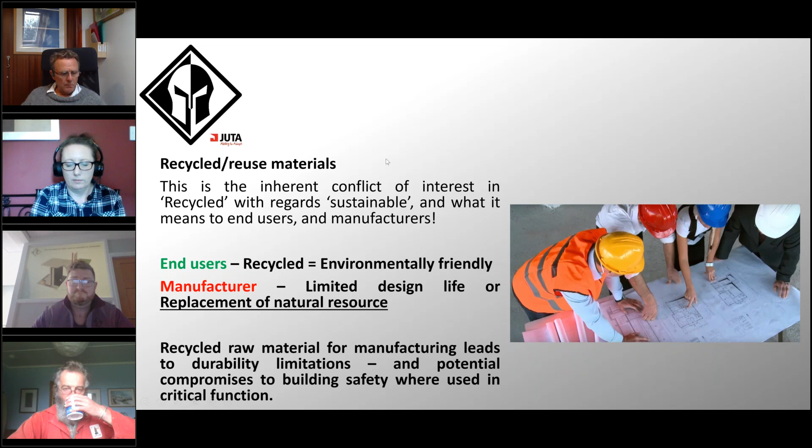And what that does is it creates two classifications of products. So we have what are called LLGs, limited lifetime geosynthetics. These are products which are not designed to perform a critical function for a long time, so usually the application function is restricted to 5 years, sometimes up to 25 years. So you may be looking at slip membranes or some facade landscaping details on the external side of a building rather than anything that goes on the inside.

Extended lifetime geosynthetics, or ELGs, are generally providing critical functions, such as protective barriers like gas membranes, and they are designed to last for a period or have an anticipated design service life of at least 50 years, which is Eurocode 0 Cat 4 structure, residential housing. So your Cat 5 structures, for any structural engineers who might be in here, the highways, rail buildings, have a 100-year anticipated design service life. So you're looking at much more robust and additionally tested materials.

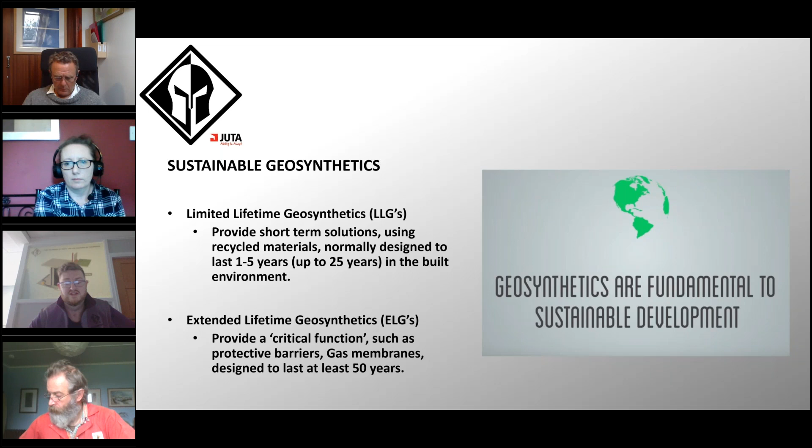Gas membranes - one of the most common questions we get asked, probably 3-4 times a day, is: is your gas membrane also a damp-proof membrane? So all gas membranes are damp-proof membranes. They start life as a damp-proof membrane. They're harmonised and certified under European and British standards as damp-proof membranes, and then we do additional things to them to give them gas resistance.

So we have harmonised European standards, and then we have local standards, which are country standards - British standards, American, we might have some Australasian standards. Gas resistance is a local standard, so that varies by country in terms of what their relevant guidance documents state is appropriate for gas resistance.

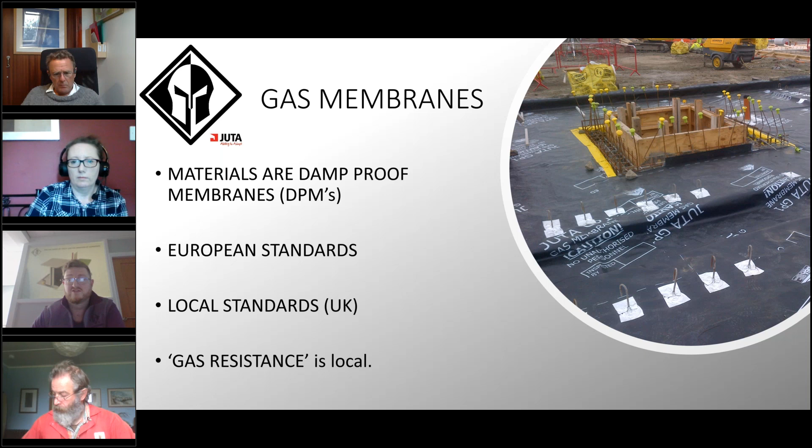So in terms of European standards, all materials sold into the EU will still be bound by CE marking, unfortunately, or fortunately, if you look at it that way, when we leave the European Union or the Common Market. But it must be accompanied by a CE mark, which details the application standard. So the product has been certified for use in the application standard to the relevant harmonised European standard, and it's marked as such, which is all about traceability as well.

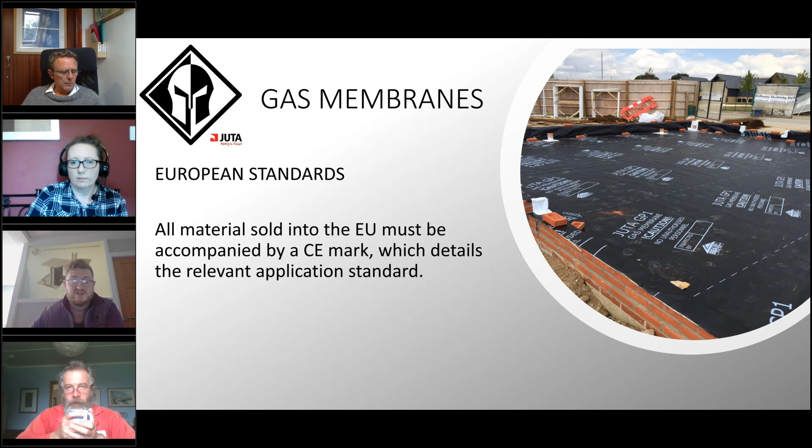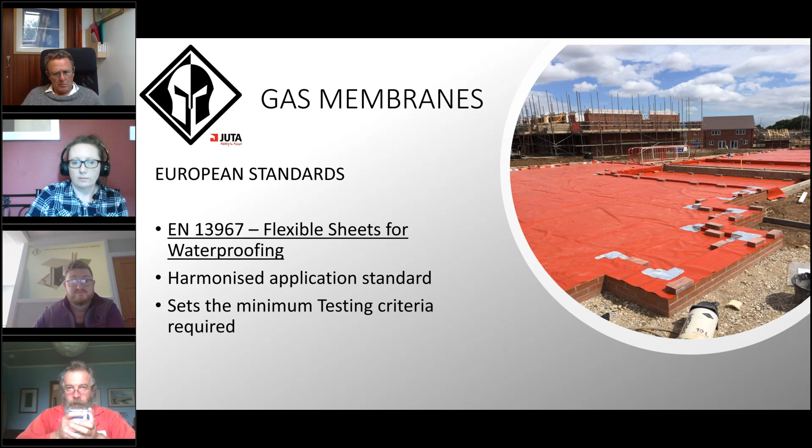The overriding standard for gas membranes, which is the DPM standard, is EN 13967, flexible sheets for waterproofing, and that's a harmonised European standard. So all gas membranes that enter the UK market should be accompanied with a CE mark for EN 13967 for damp proofing. It sets testing criteria and what we are obliged to provide as a manufacturer in terms of minimum stated properties, or essential characteristics. So we have to declare these. That's a legal obligation for us to conform to CE marking, that we declare these properties.

Now, you would be probably amazed, maybe not, how much material enters the UK market and is used in these critical application functions without CE marking. So as a basic check, we should be looking at CE marking for traceability.

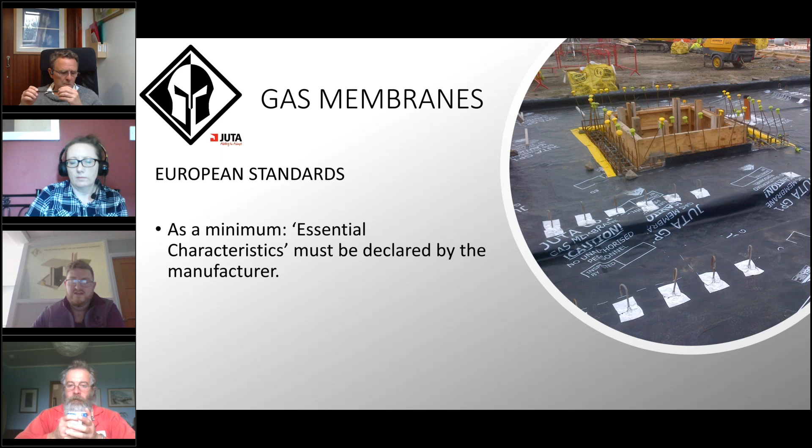EN 13967 actually has two notations, so you'll see EN 13967 type A and type T, or A/T, which is both. A is above ground, so it has a 2 kilopascal, which is a 200 millimeter hydrostatic head test pressure, and T for tanking or below ground is a 60 kPa hydrostatic pressure or 6 meter head. So A for damp proofing, T for waterproofing. If it's EN 13967 A/T, it means it can do damp and water. So the majority of above ground gas membranes are EN 13967 type A, and that restricts their application depth to within 200 mil of below ground level.

Now that relates to what warranty provision your manufacturer will give you, which I'll touch on later. So where we start using these gas membranes, or what is traditionally a gas membrane, underneath a lift pit, which is 2 meters below ground, we can't warrant the application because the material is not tested or certified to perform the application function in those conditions for a period of time which exceeds 50 years.

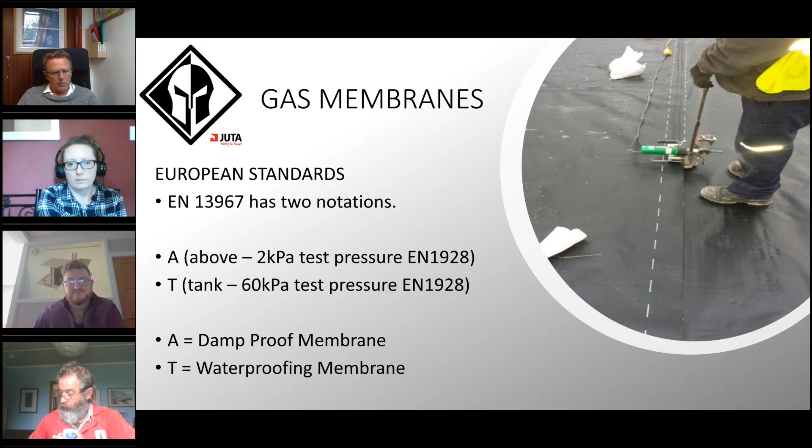So essential characteristics, and again, if we look at what we should be seeing on a classic technical data sheet - my marketing and sales department go mental because I just want to put data on everything. Because I'm an engineer, so I just want to see the data. I don't want to see all this fluffy language around how great the product is, how we're market leaders, and how many millions of square meters we've sold. I want to see the data.

So as a minimum, we should be seeing reaction to fire, tensile strengths, impact resistance, tear strengths, and a bit of durability information for EN 13967. These are the required properties or essential characteristics we are mandated, legally obliged to declare for providing material onto the market as a proprietary gas resistant damp proof membrane.

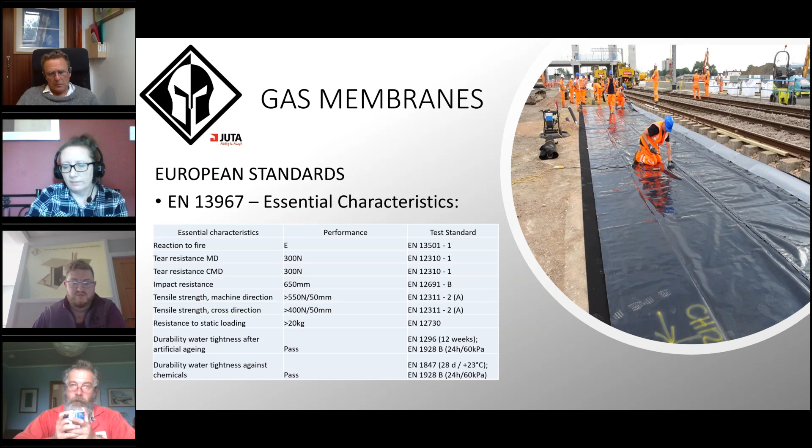So again, don't do it right now, but when you get a chance, check your folders for the data sheets you've got in there, and just sense check how many suppliers or manufacturers are providing you with that basic level of information.

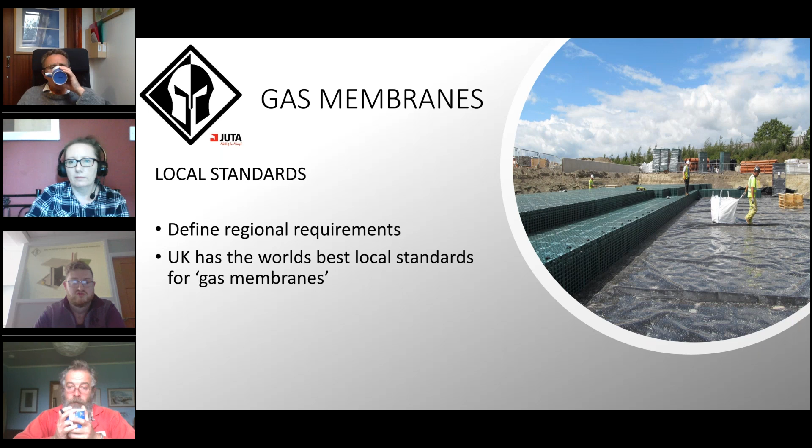Local standards define the regional requirements. So primarily we're looking at British standards, and the UK has some of the world's best local standards, world renowned for providing good, robust standards in terms of local requirements, but they're not mandated, so it's not a legal requirement.

But primarily we're looking at BS 8102 waterproofing requirements, BRE 211, 414 radon, contaminated land, 8485 methane and carbon dioxide, C748 for VOCs, which again is picking up more and more traction these days because of the brownfield side of things, and C665, which is slightly out of date.

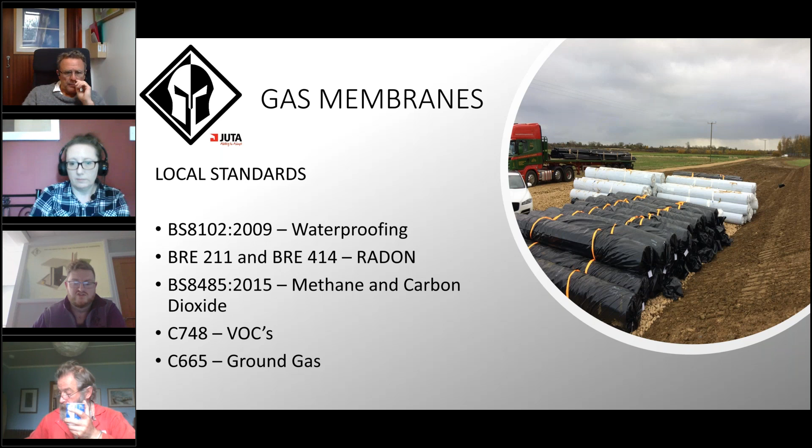I have a minor issue we can discuss later if you want, around the NHBC Amber 1 / CS2 classification. That's a misnomer, but it stems from 665 and that traffic light system. But these are local standards or regional requirements.

They're not legal, so we are not legally obliged to comply to those standards. It's guidance. This is the information we'd expect to see in the UK if you are purporting your materials to be a gas membrane or a waterproofing membrane. These are the relevant standards you should consider.

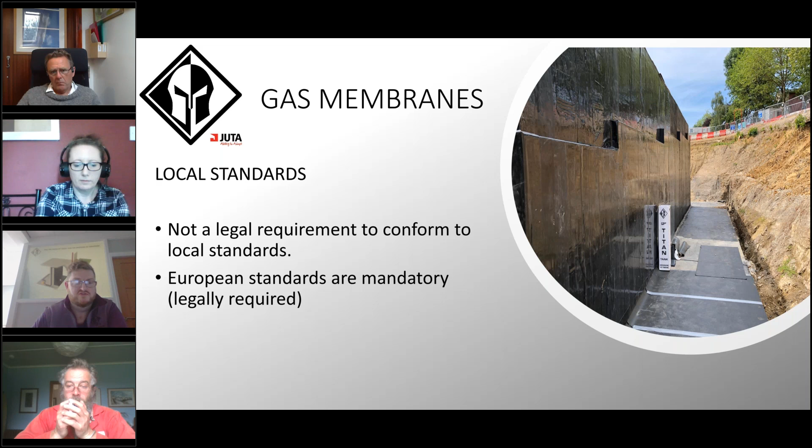European standards form a legal requirement for manufacturers. So, common gas barrier types.

We have monolithic polyolefin, so this is the same composition of material throughout. So your HDPE, LLDPE, LDPEs, PPs, polypropylene, sometimes recycled. So this is very old technology.

Reinforced polythene - this is the scrim reinforced materials which give improved resistance to tearing. The flat sheet plastics have had a tendency to tear, so with wind uplift you would see these huge lateral tears across the material around the folds. Then we've got, which is a very common breed of gas membrane at the minute, the aluminium foil reinforced polythenes.

This was primarily driven by the change to BS 8485 in 2015, where we dropped in the gas transmission rate as a benchmark for manufacturers. So we all raced to test our materials, and we found that we were looking at aluminium as the most reasonable course of action in the short term.

And then we have this new breed of materials, which are the multi-layer polyolefins. These are 5 or 7 layer products, usually with an EVOH barrier in the middle and then protected by various layers of polyolefin on the outside with no aluminium in them.

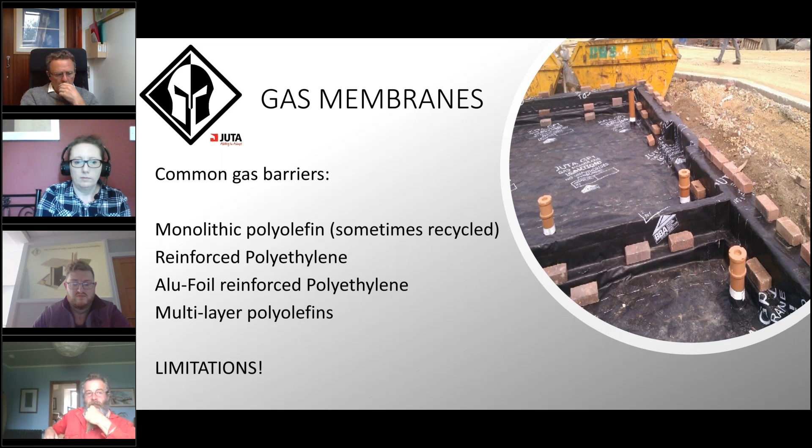But all of these materials have various limitations, and what we don't do as suppliers or manufacturers is shout and scream about the limitations. I mean, why would you? JUTA is the biggest supplier of aluminium foil gas membranes into the UK, and 50% of the jobs we're supplied onto, we probably shouldn't be using it there because of the limitations, but we're not the regulator. So if the clients, end users, engineers, architects don't want to listen to us, then that's on them.

The end use of the produced part or the product should always determine the choice of raw material. So if we look at the history or development of gas membranes over the years, 70 years ago, most of the materials supplied to perform the application function were flat sheet HDPE, LDPE, PP membranes, used commonly across the world as moisture, vapor and gas barriers.

And we've developed our understanding over time, both in terms of material performance limitations in the built environment and the advancements in technology and processing.

About mid-90s, sometime around 95, 96, all of the polymer producers and manufacturers in the world realized we could start reprocessing some element of finished goods, potentially adding in an element of recycled product from single-use plastics, and produce materials with limited lifetime application functions.

Now, around the same time, early 2000s, industry stopped asking about durability. I remember this because I started working in consultancy in 2001, and the first thing I asked was, how long is that material going to last? Like, if we stick a plastic membrane around that building, it's going to get trashed. It's going to get absolutely trashed.

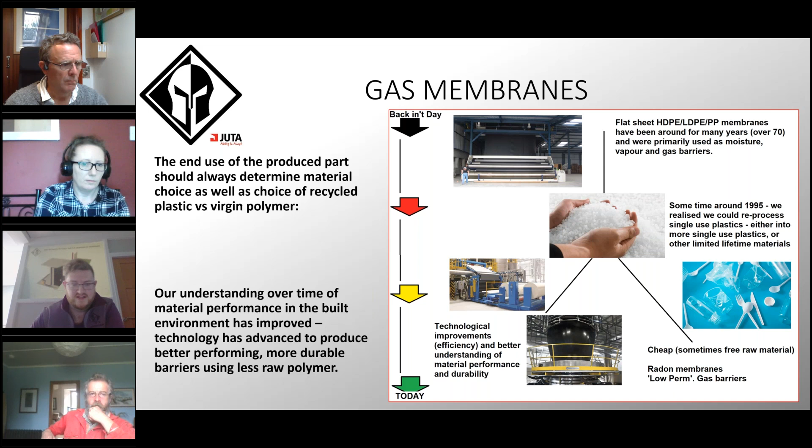We've actually, over the years, started to produce much better barriers out of virgin raw materials, so we can use less polymer, we can use it more energy efficiently, and we can make sure it lasts for a long time. So it's the two different sides of sustainability and what it means in regards to the end use of the product. Hopefully a lot of this is common sense, but I tend to find maybe not sometimes.

So if we look at the design guidance and what we should be considering, we've got, as some would have you believe, like the gospel - the gospel according to BSI, BS 8485, updated in January 2019. So it is the most up-to-date and relevant guidance document out there.

Here's my colleague arriving 25 minutes late, noted, black mark.

So you're all familiar, we've got a classification system. It's a risk matrix, and we're going to this point scoring system. Obviously the CS can be defined by simplified analysis using GSVs or a more quantitative determination of the actual risk.

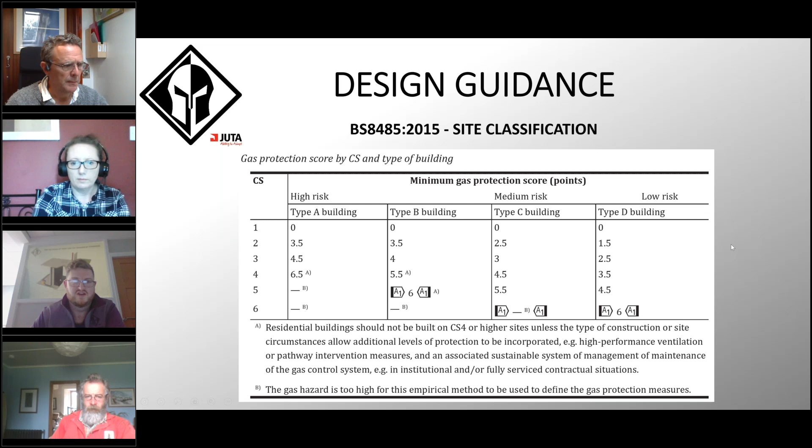We're focusing obviously on the membrane side of things today. We're happy to look at the document as a whole if anyone wants us to do any CPD on BS 8485 in more detail. And you've got a lot of text here, and as an engineer it really upsets me because there's an overuse of the word sufficiently.

So we say sufficiently impervious to ground gas, and then we define a benchmark value, which is great, and that was actually a really good thing for industry to have this. What is sufficiently impervious to ground gas without any further assessment? It's less than 40 millilitres per metre square per day to ISO 15105 Part 1 manometric.

Material should also be sufficiently durable, so durability is a consideration in there for the anticipated design service life. Sufficiently strong to survive installation and follow-on trades, sealed to the entire footprint, and then verified, so quality controlled. You'll have heard probably other people say it: it doesn't matter how good the material is, if it's installed like a bag of spanners, then it isn't going to work. So the quality of the install and the checking, particularly of the sealing around penetrations, corner detailing, to ensure you've got a robust sealed system across the footprint of the building, is an important process.

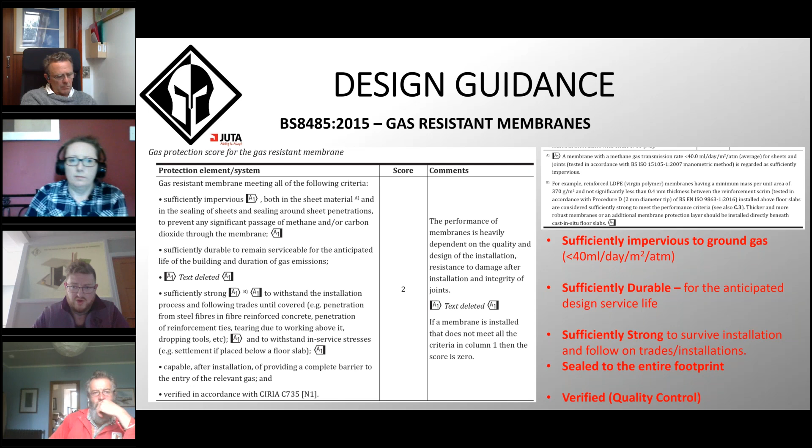But sufficiently, yeah, we can define it. So when it comes to sufficiently durable, we've got manufacturers' material warranties.

As I touched on earlier, if you are installing, for example, a GP1 product below a lift pit, and then you come and ask JUTA to give you a warranty for the material for building control, and they're expecting to see a warranty of 50 years for the material, then you ain't getting it from JUTA. We're ethical in our approach, we'll tell you you shouldn't be doing that. Others may give you that - I don't really know, to be fair, if anyone is doing that. I doubt it, I just don't think we're asking for it. But if we look at...

Clicking not coming through there. If we look at puncture resistance versus pressure, there we go.

Most gas membranes sit at this 1 kilonewton puncture resistance mark, or 1,000 newtons, which is primarily why your manufacturers or designers will look to incorporate the use of a sand blinding layer. So the lines across the detail are various stone grading: blue line 2 mil, orange line 5 mil, 20 mil, 40 mil stone. Pressure applied, and then puncture resistance on the y-axis, and you've got puncture resistance of the membrane plotted there.

600 kPa applied pressure is standard protection efficiency testing for geotextiles. So we know a geotextile will generally protect a membrane under a 20 mil aggregate, or laid down onto a 20 mil aggregate before the membrane goes on there, and 900 kPa for truck loading. So we generally don't encourage the use of vehicular movements on these membranes, and particularly no slewing.

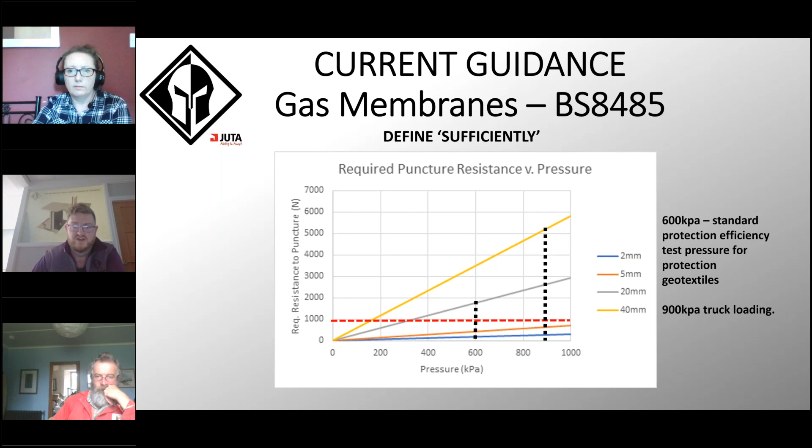BS 8485 is a great guidance document that encourages the use of qualified installers. As we creep through the coronavirus period, it becomes more prevalent that ground workers are looking to save money by not using specialist installers. They say, oh, we can do this ourselves, we'll get someone to verify it, validate it, tape it all together, and it'll be fine. Someone's going to sign it off for 500 quid, I'm happy.

But the reality is they generally aren't doing that every day. They don't hold the relevant insurances to give workmanship guarantees, which is why specialist installers exist. They are specialists and experienced qualified professionals in that field, and they have insurance, so they can give guarantees on the workmanship.

Validation is a requirement in there, as is the consideration of additional influences on the system, such as hydrostatic pressure. They throw it in there quite subtly in BS 8485 about hydrostatic conditions, without making much reference to the fact that most gas barrier materials are actually not designed to be in those conditions. It'd be far more reasonable to just say we should be using more robust materials in below ground applications.

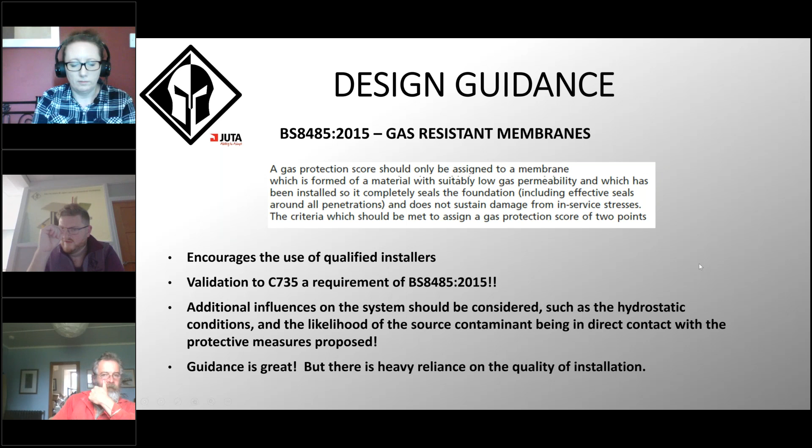Just while we're on BS 8485, I'll quickly touch on Table 5 as well, the structural element. There was a change in 2019 to effectively remove the grading reference for anyone involved in structural waterproofing. There was a whole host of confusion around point scoring for graded environments. So the point score in Table 5 is for the structure only, just the concrete element. It's not to be attributed to things like internal cavity drainage membranes, which inherently allow the risk on the inside, which is bad practice, or for the membrane on the outside.

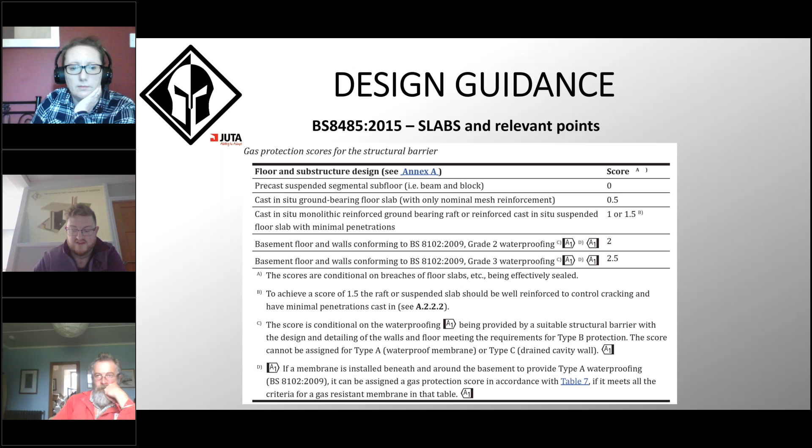Now, the note at the bottom says if a membrane is used around the structure to provide type A waterproofing, it can be assigned a gas protection score if it conforms to Table 7. So it must meet all the requirements of Table 7. You'll hear quite a few people say, oh, such and such has written me a report to say my membrane is gas resistant. That's complete crap. It should be a risk assessment based on any particular given site, not a holistic approach.

BS 8102 leads us nicely into this, again for anyone dealing with below ground structures or structural waterproofing. Because of the 8485 less than 40 mil benchmark, we've seen an advent of the use of aluminium foil products below ground. So what some suppliers are doing is taking an aluminium foil gas barrier damp-proof membrane and a GCL, which is an old school waterproofing product. They glue the two together and say we've got a gas and waterproofing barrier. Again, that's a recipe for disaster.

Aluminium foils, as we've talked about, are not designed or warranted for these application functions. On the negative side, they remove the bonding element of these 8102 type A bonded systems. On the positive side, it prevents hydration of a GCL type layer. And contrary to popular belief, aluminiums don't self-heal. Yet these products are marketed as self-healing gas and waterproofing membranes, despite containing aluminium.

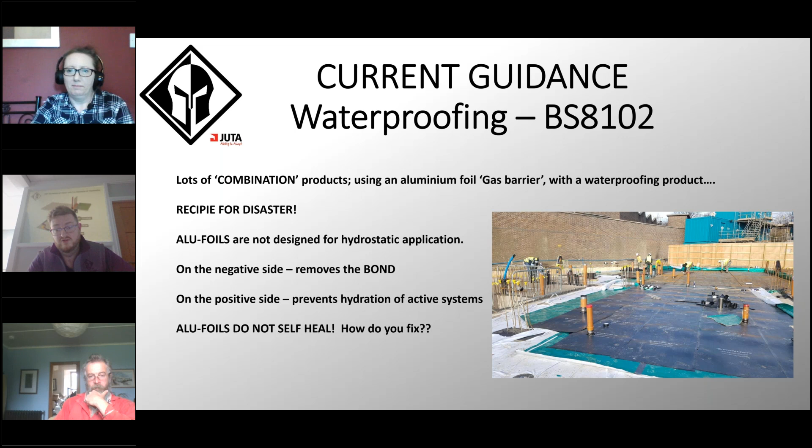So the last time I checked, Skynet was not live. Terminator 2 technology doesn't exist. If it did, we probably shouldn't be here - we should be running for the hills, getting in the bunkers. Metal does not self-heal, like fact. So that's a red flag in terms of marketing.

C748, guidance on the use of plastic membranes as VOC barriers, is a risk-based approach. There's some confusion about this document because unlike 8485, there are no quantifiable performance limits of material like the gas transmission rate of less than 40 mil. It's an information gathering exercise. What this document does is point you toward the information you'd expect to see when specifying or considering materials as VOC barriers. The uncertainty at present is there are hundreds of products out there which say they are VOC and hydrocarbon barriers, without this information. Hydrostatic application conditions are a consideration in 748.

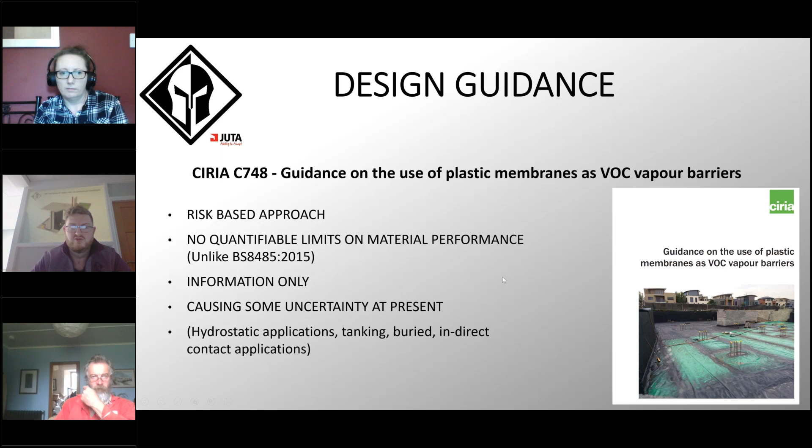Obviously the assessment with gas in solution or hydrocarbon solution is different to gas or VOC vapors, but without the information, you can't even begin to make those assessments. So C748, as many of you will know, has a minimum set of test criteria you'd expect to be provided by the manufacturer or supplier.

It should be tested for permeation rate against the challenge chemicals, the big nine—BTEX, hexane, vinyl chloride, PCE, TCE and naphthalene—to ISO 15105 part 2, and then have durability immersion testing to EN 14414 and 14415.

The only one we can't do is vinyl chloride, because an immersion test for 60 days at 23 degrees C with vinyl chloride is essentially creating a bomb. No commercial laboratory will complete that test—it's a military grade test and it costs £250,000, so it's not commercially viable.

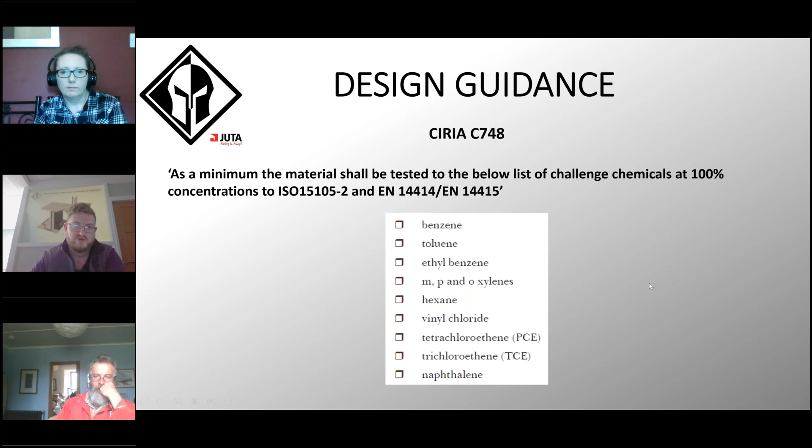So anyone reporting that is basically bullshitting you. Just be careful on that as well.

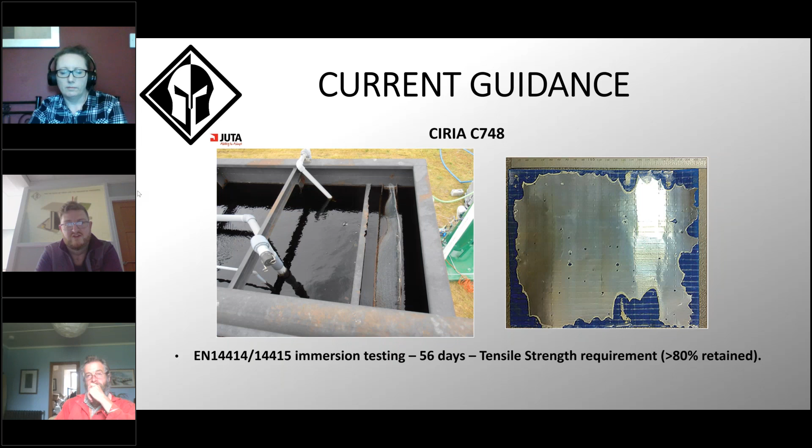An example here of aluminium foil that's come out of an immersion bath—actually an acid bath. You can see the acid has stripped the polymer back and begun to attack the aluminium, corroding around the scrim nodes of the foil. This forms the basis of why we don't warrant the use of these materials in the application, because we know they will fail over time. It's a limitation of the material.

Validation to C735, good practice, is a check, design and detailing service. They will check the competency of the installer, integrity test the membrane, and then sign off.

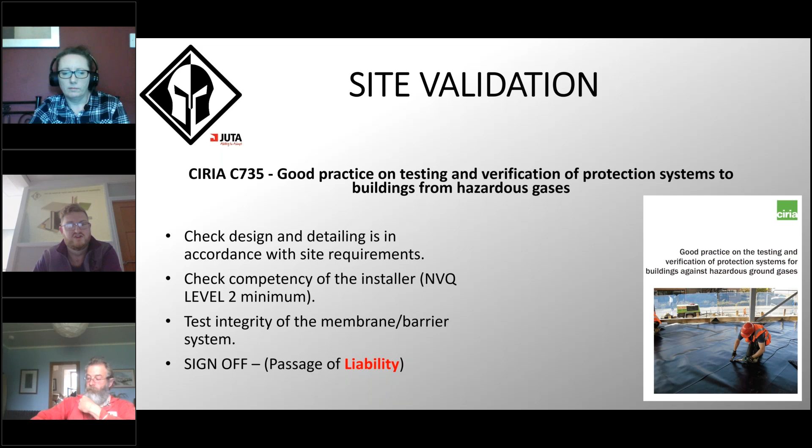This is a point of debate for me with a lot of verification or validation companies in terms of liability—like, 'we have no liability here.' Well, I'm afraid you do, particularly where the installer isn't holding relevant insurances for workmanship guarantees. There's a big portion of liability if you're checking and signing off work for unqualified and uninsured installers, and NVQ level 2 doesn't provide a level of workmanship insurance—that's for the individual.

It's often overlooked, as I'd imagine many people in this room would agree. You'll be brought in at the last minute, like 'oh God, we need to get this membrane signed off,' but it's half covered in concrete already. What can you do? Well, you can't do anything. It's problematic because it's completely unregulated.

There is some self-regulation going on—there's the British Verification Council, the BVC, which has recently formed, and the Property Care Association is picking up the baton on that side of things. You've also got Claire, who's running an accreditation scheme for verifiers, which will be, as I understand it, like a license system—you go through a competency check and become a licensed verifier.

So industry is self-regulating because it realises it's full of cowboys. If I got bored and decided I wanted to make some quick bucks, I'd set up a verification company and start validating gas membranes—plus there's the insurances around the whole thing. If you're sat in a geo-environmental practice, it's natural to have insurances for that type of work, but not for some pop-up overnight verification and validation companies. Just be aware of that.

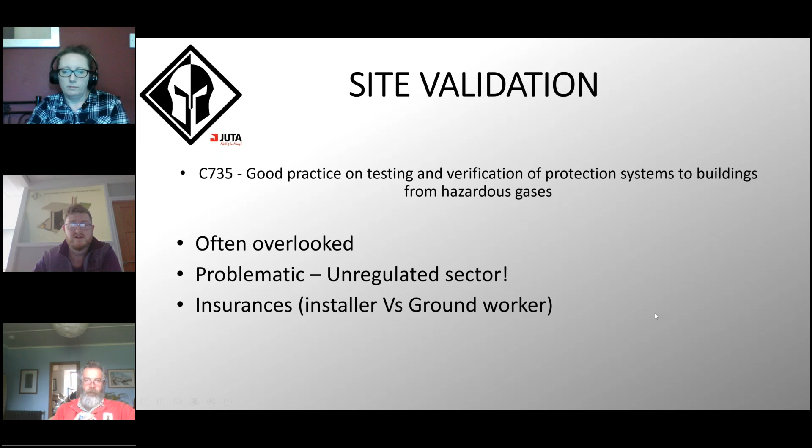So, considerations: guidance creates a shopping list for information. Sometimes it feels like you're speaking common sense, like 'of course it does,' but we don't always go down that list—we become comfortable with what we've done in the past. Users are encouraged to seek this information every time and take into consideration the application setting to determine whether the proposed barrier is suitable, fit for purpose, and designed to last.

So, what is the anticipated design service life of a gas-resistant DPM? Put your answers in chat. I'm not going to wait, but let's see who's been listening. Maybe no one—Alison's going to tell me everyone's gone to sleep or left. That's fine, it's just me and her. Moving on, bear that in mind—what is the anticipated design service life?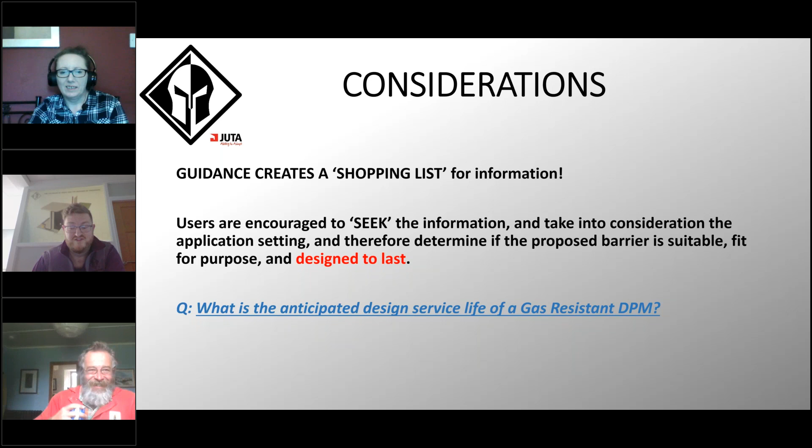We should be looking for CE marks and DOPs—DOP being a declaration of performance. This is a manufacturing quality control of the material, and that is what sets the benchmark for a warranty. So we give you a material warranty that the gas barrier will still be within a 95% confidence limit after a period of 50 years against that DOP. That's essentially what a warranty is—a time frame for which we expect the material to perform at those values.

For radon membranes, we should be looking for permeation rates—or better, the diffusion coefficient. I see a lot of material out there without permeation rates or diffusion coefficients, and the same goes for methane and carbon dioxide permeation rates for materials.

There's a lot of carbon dioxide risk assessments or risk appropriate barriers selected without the permeation rates for carbon dioxide. So they'll say, well, BS 8485 says we need to test the methane transmission rate to 15105 part 1. But methane is not the risk driver on this particular site, it's actually carbon dioxide. So without the information, how do you know that that product is performing the function as a carbon dioxide barrier?

Common sense. VOC permeation rates, so we should be looking for the information, asking the question, challenging the supplier. The durability data, particularly with regards to immersion in challenge chemicals, and then certification, so independent certification, BBAs, NSAIs, BDAs sometimes, and the material warranty.

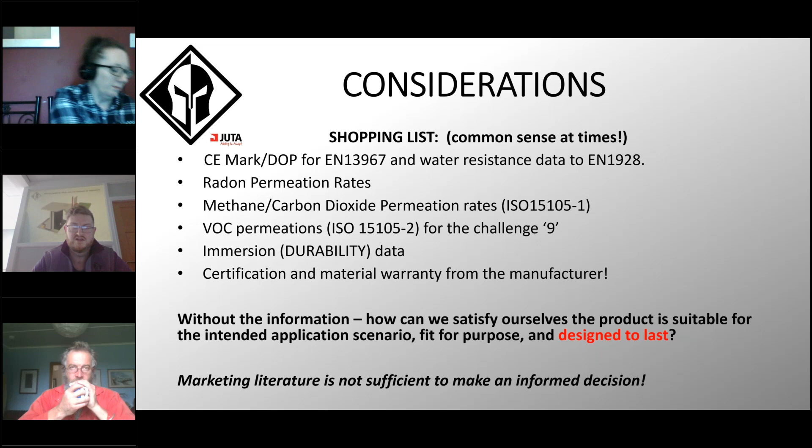Myths. Weight and thickness, yeah, absolutely meaningless to a manufacturer. So they're non-harmonized properties, so we don't have to declare them. There's no legal obligation for us to declare weight and thickness because they are not an indicator of application performance or mechanical and hydraulic performance.

They're a good index check for manufacturers though, so we know the way we manufacture a type of product with X amount of density of polymer will give a puncture resistance of Y. So as long as we're in that weight limit in terms of manufacturing, we're looking to get mechanical performance at the end of it, CBR, tensile strength, whatever of Y.

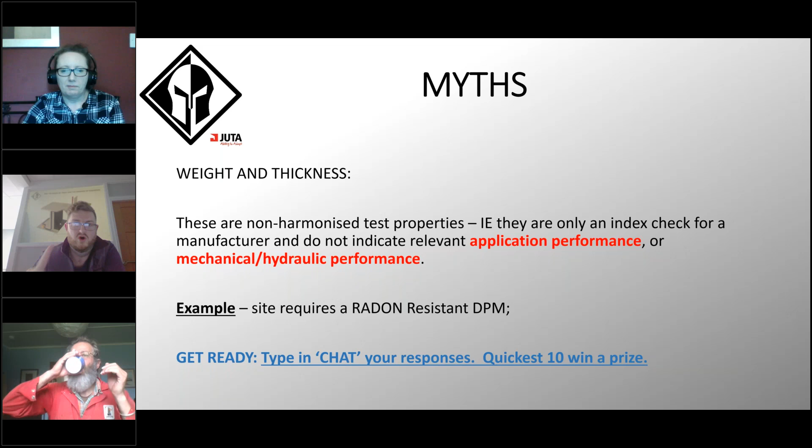Quick fire. So we've got a site, yeah, there's an issue with radon. We're looking at radon resistant DPMs. We've got 2 products, so your options are 1 or 2. Quickest 10 answers win a prize.

2 products are put in front of us. They're both marketed very well. We've got product 1 with a weight of 440, product 2 400. Roughly the same thickness, one is slightly longer than the other, one is slightly wider. They have a puncture resistance: product 1 is 3 kilonewton, product 2 is 2 kilonewton. Which is the better product? Quick fire, fastest 10.

You're all slow. Oh, well done, Rebecca, you won a prize.

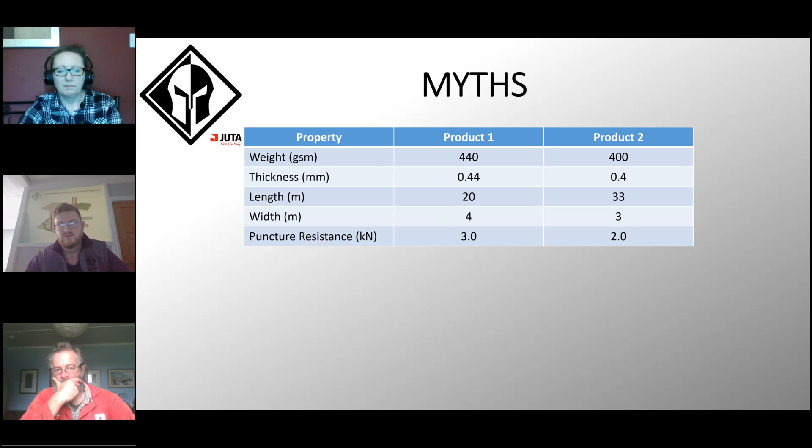1. Okay, so it's interesting - that's good, you don't have the relevant information to make the decision. Because it's a radon membrane and there is no information on radon diffusion coefficients in the information provided. So you turn around and say, listen, you told me this is a radon membrane, where's your radon diffusion coefficients? What's the material made of?

Manufacturers come back and say, product 1, it's recycled polyethylene, it's super sustainable, it's a folded sheet, we get loads on a pallet, it has a radon diffusion coefficient of 1 × 10⁻⁸. Product 2 is virgin, single wound material, has a diffusion coefficient of 1 × 10⁻11. Which is the better product? Type away.

Okay, good, so we're swinging. We still don't have enough information though, because we know the anticipated design service life of the radon membrane is at least 50 years. So we go back and say, thank you very much, but how long? Hey, well done, Catherine - what's the anticipated design service life?

So product 1 comes back as 10 years, we're prepared to warrant the material for 10 years. Product 2 comes back as 60 years. If anyone thinks it's product 1 still, then you need to quit your job and go verifying gas membranes. 2 is the better product, and the fastest 10 have just won the ability to specify JUTA on your next project. So well done, guys.

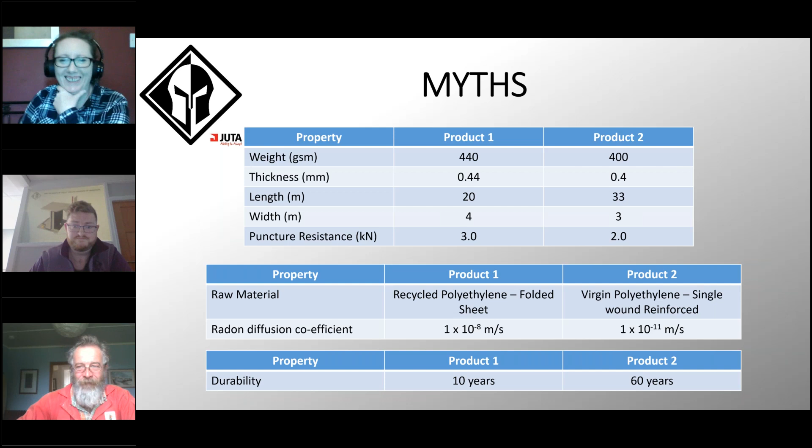Congratulations. And to tape or not to tape, that is the question. So again, we often get asked this.

So adhesives, butyl bitumen-based products, are not designed to last indefinitely. That's a chemical reaction - the tack is a chemical reaction, yeah? And as we know, everything in nature wants to get back to equilibrium, so we're looking for stable inert materials. Butyl bitumen-based products are not. So you are looking at, in favourable scenarios, a typical lifetime guarantee from a tape manufacturer of about 10 years, yeah?

VOCs and hydrocarbons will readily attack and degrade these adhesive type products. C748 says that where tapes are demonstrated to have the same performance as the membrane, they can be used - good luck with that because they don't exist. I've spent the last 4 years of my life scouring the planet for these products, and they don't exist. We should be thermally jointing these materials in aggressive environments because the joints are the weak point - the joins, the seals to penetrations, corners are the weak points, and we are using the weakest performing product in the most critical parts of the install.

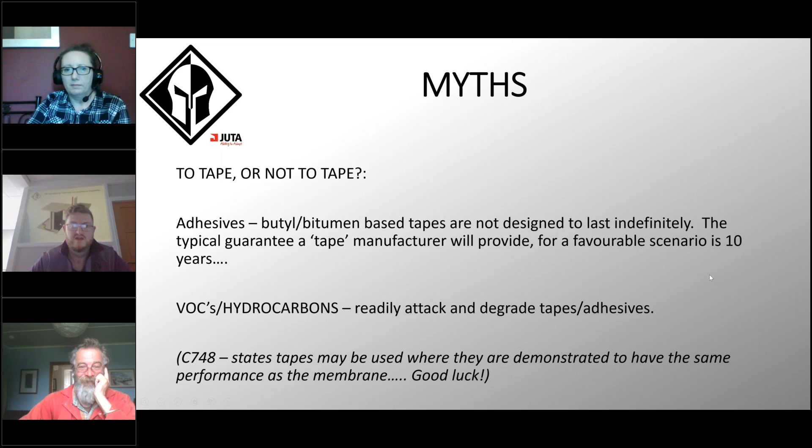This particular site is using a marketed VOC barrier without any information to C748. So it's marketed and sold as a VOC barrier without any permeation rates for the challenge chemicals, challenge 9 to ISO 15105 part 2. And it is sealed around the corners and the penetrations into the slab with an aluminium foil bituminous membrane.

So the anticipated design service life of that system drops to 10 years. What that means is it's reasonable to expect a level of maintenance will be required on that system after about 10 years, or the manufacturer won't warrant that system. So this is installed or provided by a supplier who is effectively just looking to sell material.

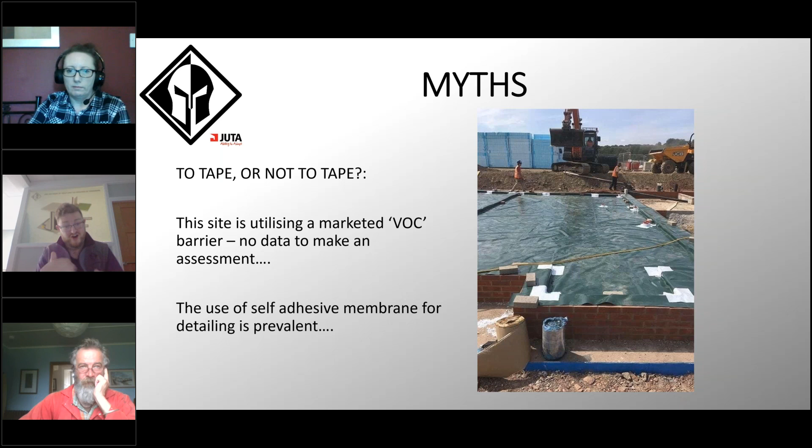If I sell a pallet of tapes with every job, sales are jumping up and down because we've increased the value of the sale. If I say you should use a specialist installer and thermally joint as much as possible, I reduce the value of the sale. So selling tapes and accessory products is a sales and marketing approach - it's not a competent technical and justified argument.

Tape joints are acceptable for low risk, and I've highlighted low, in waterproofing and radon protection applications. This is market perception - the market perceives that tape joints are acceptable for these scenarios. For me, that's a bit of a misnomer, because as we identified earlier, more people unfortunately die of radon-related cancers than of methane and carbon dioxide and exploding houses. So the risk of your basement flooding with water, with you standing in 2 foot of water, is reasonably high risk. We should be looking to seal these materials as best as possible.

Welded joints are recommended for ground gas protection - they have enhanced durability, and that is true. For me, we should be using thermal jointing in all occasions, and welded joints are required. Hydrocarbon VOC resistance is, again, true - we cannot demonstrate a taped system as a VOC protection performs as good as a jointed, thermally jointed system.

If in doubt, ask the question about anticipated design service life. And if someone takes the punt of lying to you, then you have it in writing - so if something does go wrong, you have it there in writing. Well, such and such said it's going to last 60 years with this tape without any information - take a punt on me, please. It's on them.

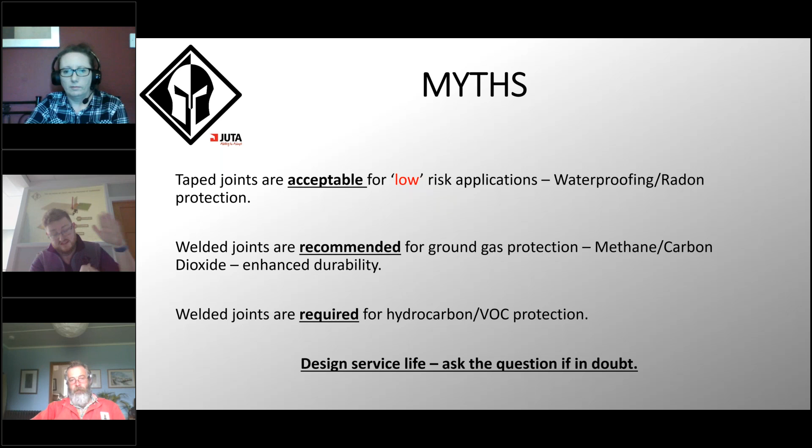We just have to go back to basics. For me, it's just about applying common sense - learning from our mistakes, improving our knowledge and understanding over time. The copy and paste mentality of 'we've always done it like this, we've never had a problem before' actually stifles innovation. So we've got to continuously learn, try new things and develop with the industry.

I was speaking to a guy the other day, and he said he'd had the same CPD from a particular supplier twice a year for the last 5 years. What's the point? You're not learning anything new, having the same stuff thrown at you time after time after time. We've got to change, try new things, listen to new things.

These third-party certifications provide reassurance, but that's all - they're not a warranty provision. There's no liability from something like a BBA certificate, which upsets me, because we spend an inordinate amount of money with these guys to use the branding and have the certification, but all the risk and liability and warranties still sit with JUTA.